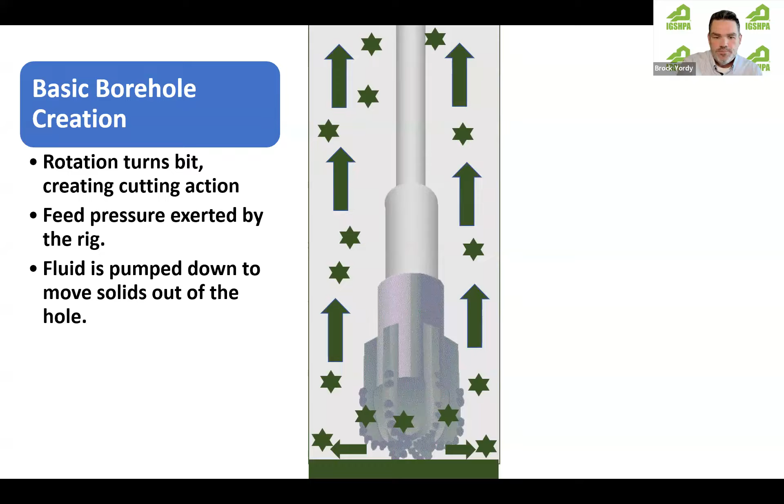If I'm thinking about what the goal is for me as a driller, as a collaborator on a job site, as we're completing this bore field, a hole is not a hole unless it's open, which means it's going to create solids and waste that we've got to manage. It needs to be stable so I can get that loop to bottom. It needs to be straight in the desired direction, and obviously we're playing with angles, which changes our physics and hydraulics of drilling. It needs to be gauged so we're putting the right amount of grouting material around there, and that we're not influencing outside of our bore field. Clean, meaning I'm able to easily get that material, my loop, my grout, everything in, so I have simple product installation, and then efficient product extraction.

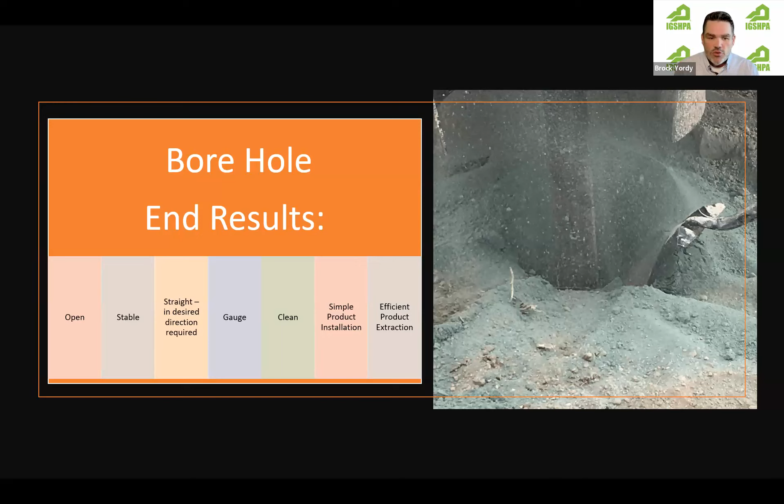Those are our goals, and each one of those can be directly influenced by our drilling methods.

So if I start thinking about what the determining factors are to my method, obviously the big one is geology. If I'm in the Canadian Shield, what type of cutting action and weight do I need to be able to cut that granite? It gets different if I'm in a coastal area.

I was just on Kiawah Island yesterday on a 12-hole residential geothermal project where the formations were very fragile, going from sands and gravels into seashells and coastal stuff into a marl. If I had exerted the same pressure I'd use to drill granite, it wasn't going to work. That's where we get into mud rotary, casing advance, air, foam, sonic. It's got to be the right tool for the right application, minimizing the impact, so we can continue to make the bore field what we need it to be.

So formation hydraulics, the way I can break the fracture of the ground, is very important to the stabilization of our hole, how we're going to get loops in, and how we're going to influence the transmissivity of that loop field as we continue. Next, depth to water.

That's very much about minimizing the impact. We talk a lot lately about air being the way I want to go - I don't have to have a drilling fluid, I can manage these cuttings into something. But when I start producing water out of the ground, let's face it, every New York Times and Washington Post article right now is all about groundwater, because it's a protected resource that we need, and it's not infinite. We need to understand, when we start producing water out of the ground, what damages are we having.

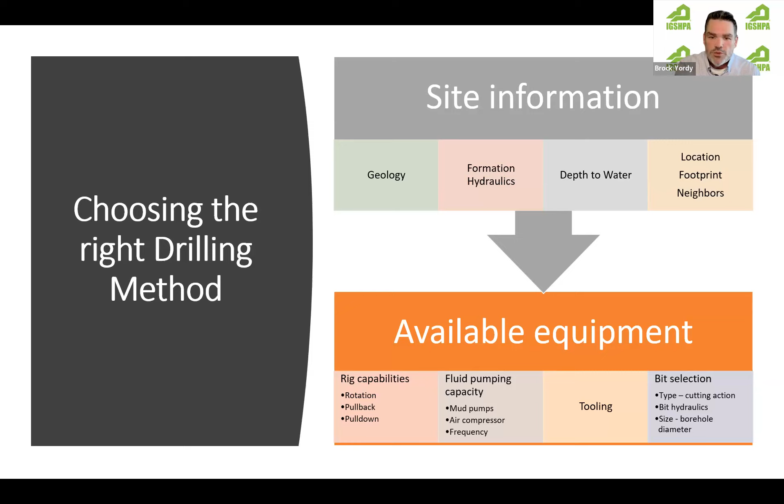So this is not a geology course, and since college and all that I did with geology, I think craft beer has very much impacted how I identify rocks these days. And I know there's a couple geologists that I've seen pop in here.

I'm going to break it back down to what we really need to know, and that's how can I drill it, how can I not, can I break it, can I not break it, can I minimize that impact?

And it starts with our non-reactive formations - that's our sands, our gravels, our rock. They have porosity, they have pore space. We have to minimize the pressure that we exert if it's air or mud, and how it goes out into the formation and creates a larger borehole erosion. I need to look at my permeability - how easily can I move fluid through it?

And then cutting action - again, this is why we see so many different types of bits, and we're going to jump into bits next on site, but it's how can I cut it? What does my particle size look like? How can I dispose of that? How can I remove it at surface?

What is the weight? I get out west, I can get into iron pyrite and get into many other aspects that are really going to impact what I need for pressure to be able to move those cuttings up out of the hole. Depth is 100% impacting that.

When we went from 300 to 400 to 600 to 800 foot boreholes, it takes more fluid at gallons per minute and PSI to be able to evacuate that hole. And what size solid do I want to make?

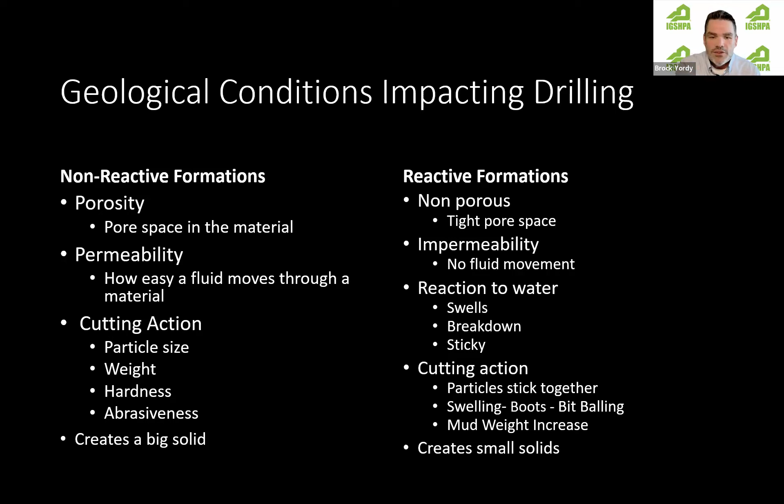The drilling process will always be disruptive. Many times as drillers, we say, it's just going to be a muddy job site. But we can manage these things - how do we minimize the impact that we're going to have on that?

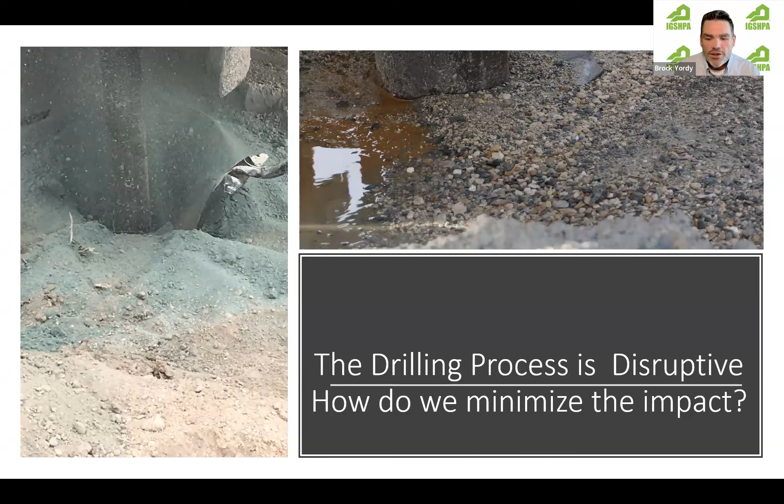So if I'm thinking my idiot's guide to drilling non-reactive soils, what am I thinking about as I look at this log? I look at a USGS log, I look at a test well log, sands and gravels. First and foremost, what is my stability? What is the influence that I'm going to impact? How can I erode? How can I end up using more grouts? How can I end up with a bigger borehole than I need? How can I slough that in and have poor installation issues?

Those are why I'm thinking mud rotary, when we get east of the Mississippi and then into the upper Midwest, is very predominant. It's because it's been very low influence and it's pretty cheap to operate, other than now we're getting into a disposal issue. If I get into rock, solid size - am I using a hammer? Am I using a PDC?

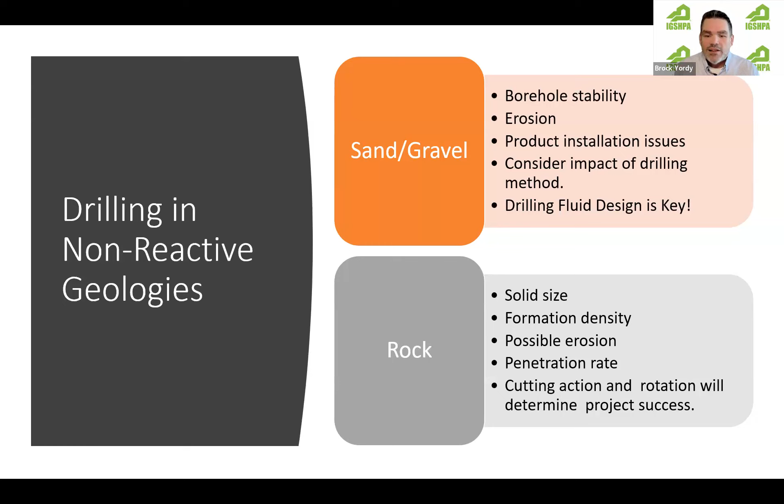How am I creating that cutting size to make it a half inch to an inch so it comes up out of the hole? What does that formation density look like? That's going to tell me my timeline—how many minutes per rod, how many hours per hole it will take when I get into these rock formations. Cutting action is exactly what's going to determine our project success on rock.

It very much was clays and shales, and they react differently. Some are going to be weathered, so they'll break down—not that hard to get out of the hole. Other times it wants to be sticky and reactive, and it hasn't seen water in a very long time, so the amount of fluid we give it allows it to become alive.

That's where we get into sticking drill pipe, plugged bits, cutting sizes, and surface areas that start to bind together—a boot formation, where cutting sizes bond around the stabilizer or the tooling, and we're not able to get that fluid up out of the hole. It starts exerting pressure on the outside of the borehole, and we end up losing fluids, getting inadvertent returns, and an increase in fluid density because they want to go back to their colloidal size, becoming part of the drilling fluid and increasing that solids content.

So what can I do? I can prevent these reactivities, these breakdowns, these sizes, with the right fluid design—whether that's air and a clay inhibitor, or a mud with a chemical inhibitor, using surfactants and soaps, and partially hydrolyzed polyacrylamides called PHPAs that wrap around them. That's things we have to consider as we're looking at how we're going to drill this and what influence we're going to have.

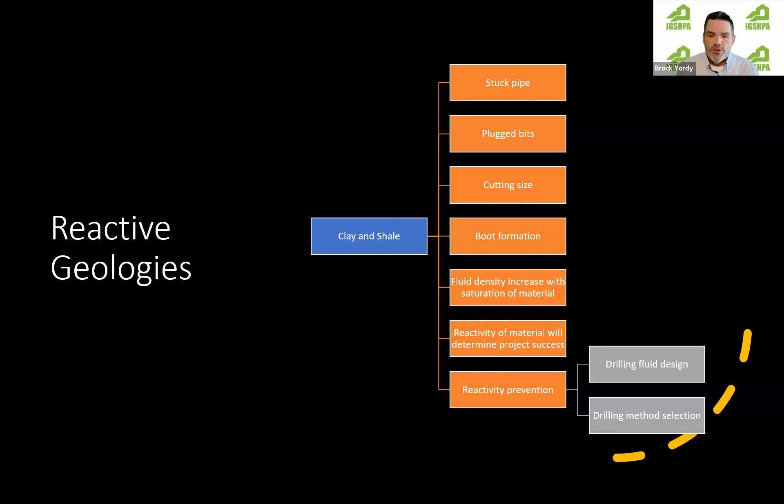I'm a fat kid, and I like to eat. When we look at what we want to cut—a clay style, a soft formation—I'm using the front of my teeth, thinking like an apple: I bite it and then chew those pieces into smaller bits. Now if I get into rock or denser formations, I need something more like my molars—I take a bite and then grind that up into a point that's easy to swallow. That's when we get into bit selection.

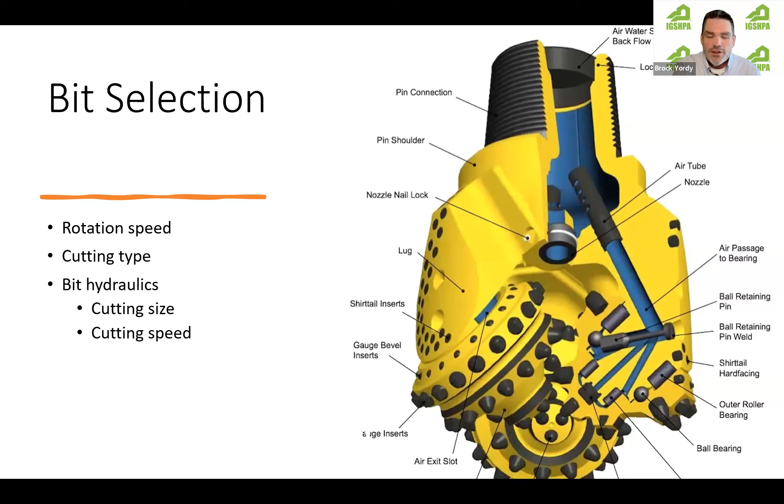We have endless technology from the oil field and other industries now that we can apply. It's funny, I say 'now,' but they're all 40, 50 years old. Garen Ewbank was talking about PDC bits in the mid 90s, and at Ball State we were like, wow, these PDC bits are the greatest thing ever—and they're like, yeah, these were all built in 1991.

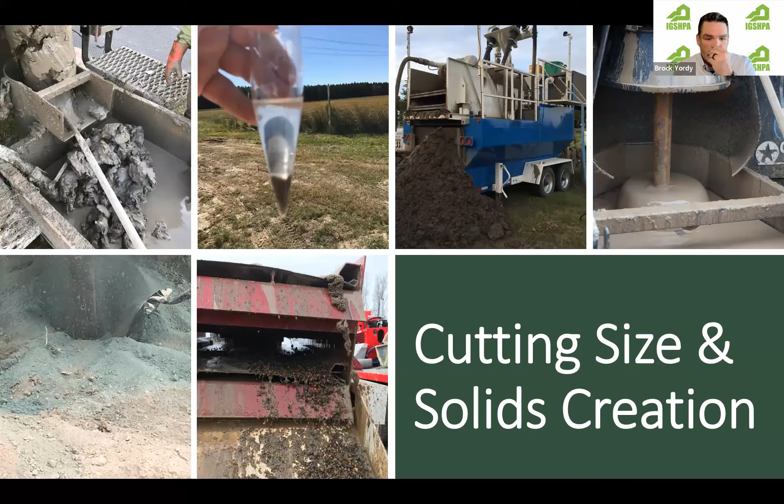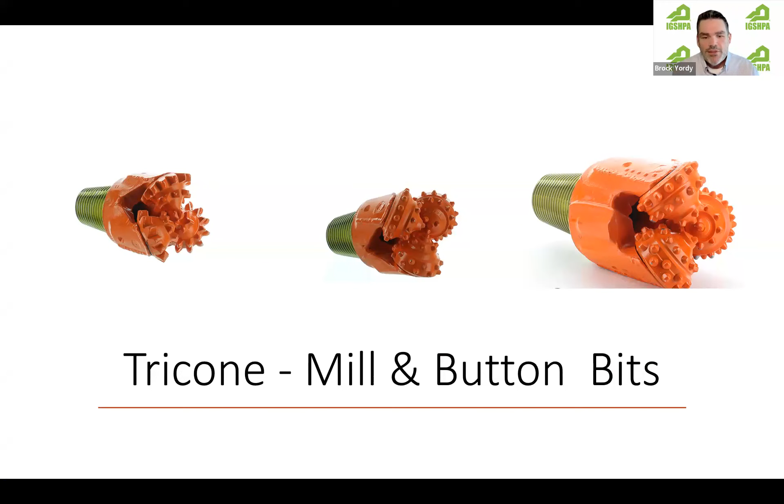So the oldest technology we have here is our tricone bits. This is really what allowed Howard Hughes to be crazy—the patent on this tricone bit and the ability to have that cutting action with the skirting, going from a mill tooth, which I'd use for those soft reactive formations, to a button, which is like my molars to drill rock.

The big piece we've lost along the way is our jetting action, and part of that is from fluid flow. For the geothermal industry, that 5 to 6 inch hole, we only really need about 150 gallons a minute to maintain the right uphole velocity. And we'll get into that.

A big piece of bit life and maintaining good production rates is having the ability to force the cuttings away from the bit face and up around the rod so we can get them to surface and remove them. That requires PSI and jets. Jetted bits are still a very important aspect.

We've just somewhere along the way lost that in tribal knowledge and wanting flow. There are plenty of places where I get into reactive formations where if I can have the jetting action—this doesn't mean we need to go out and buy a big, bad oil field piston pump. It's just allowing enough of the right force exerted at the bit face to keep it clean.

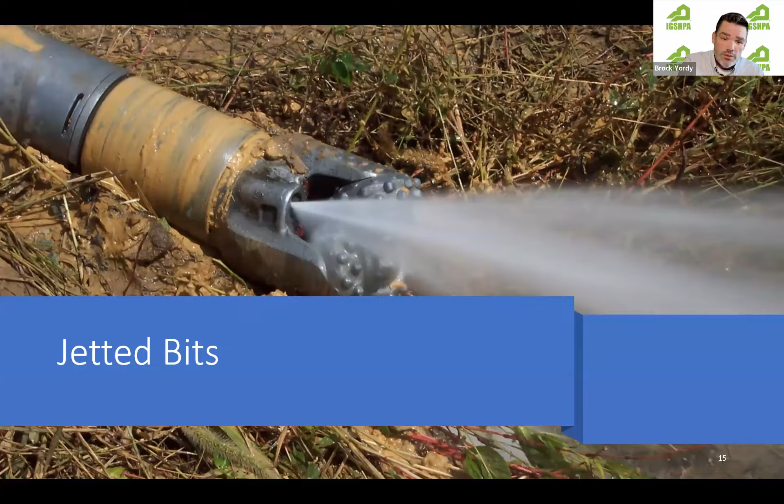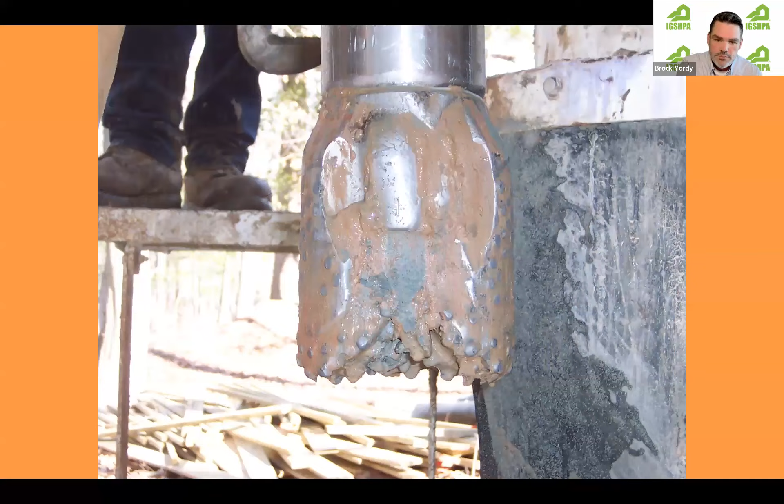We see this on jobs, plenty of places, with young drillers over-drilling into a dense clay formation, and then we end up pulling pipe and pulling these sleeves of clay.

Again, this is no different than if I'm going to make a smoothie. What do I need to do after I put my ice and my milk and my bananas and everything in there? I can't start it on high rotation and think I'm going to get a good cutting action. I have to ease into it, and I also have to ease into how I'm going to penetrate.

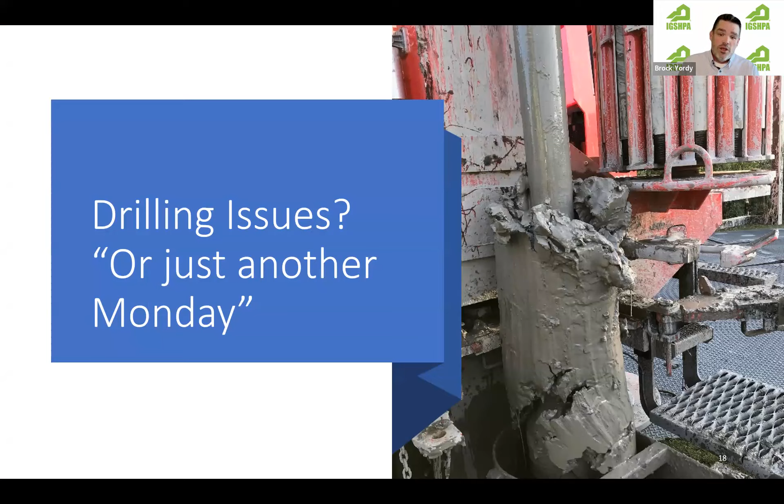So ideally, we want a bit that is able to move the cuttings away from the bit face. When we don't, all too often those abrasive solids create heat, start us on that path of deviation, and we're no longer able to maintain the production we want.

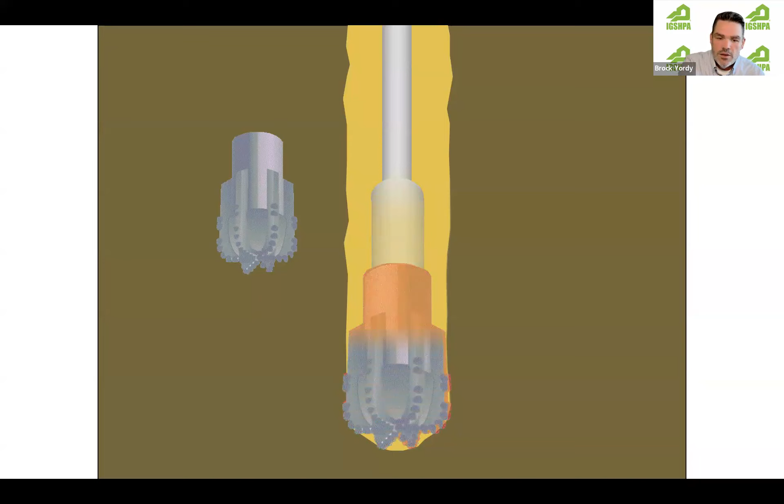So we're using that fluid to move the cuttings away from the bit face so we can keep it clean and keep the cutter heads going. The other half of this is, as we continue to drill more complex boreholes, if we have a drilling fluid full of solids on surface that we're sending back down, we're doing the same thing and causing as much damage. We'll get into that.

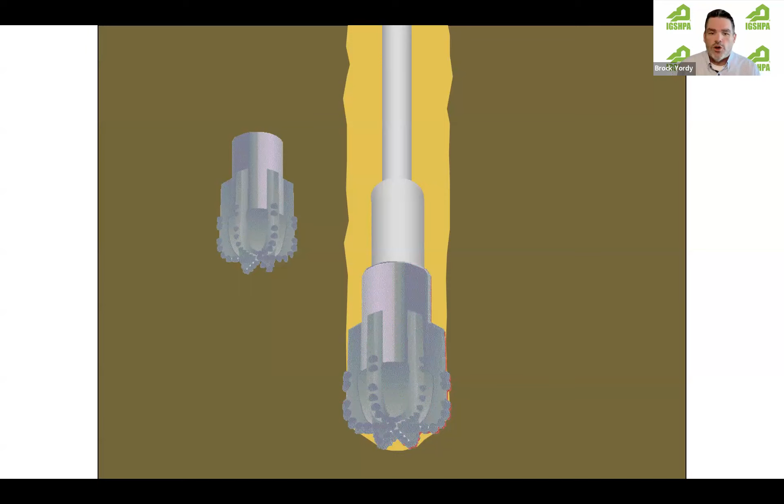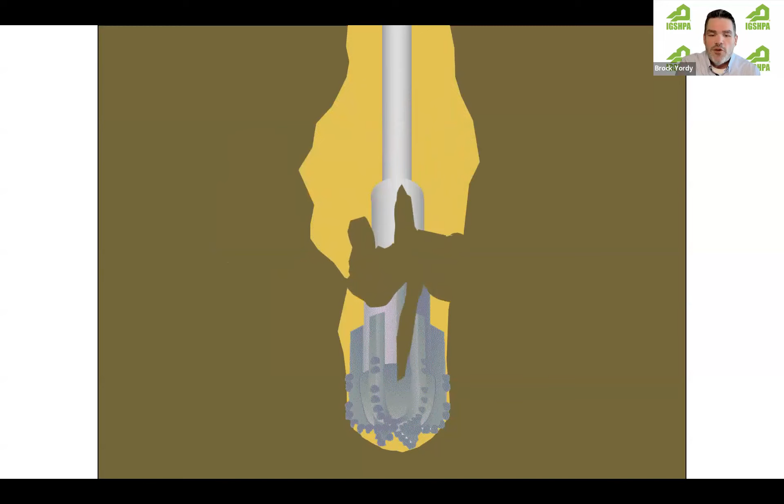My nice, neat animation is not working, so we'll just move on. This is definitely what we do not want to have happen.

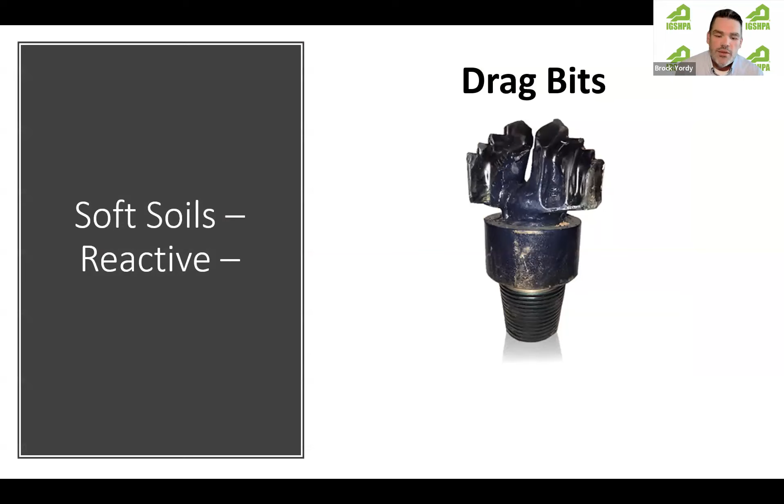Drag bits are a desired piece of tool that we need on surface in some places, but depending on the design—from a single wing to a chevron—it's all about cutting action and slow penetration. That's what I'll say about drag bits. But this is not slow penetration. We're trying to make a cutting that is the size of a quarter, an inch in diameter.

Polycrystalline diamond compact, or PDC, can stand for pretty darn costly. There are plenty of these bits out there, and now we've hybridized them with drag bits so we have the winged capability for cutting soft formations, but also when we get into competent limestone or shale, we can make good hole with the diamond cutters.

These bits work fantastic if we have the proper weight on bit, which means we're using stabilizers. We can't use pull-down on these.

By the way, running a bit like this means those diamond cutters make very small cutting sizes, which when we go to disposal takes more surface area for the fluid to move them up hole. It's a much finer material to separate out, which means more pumping off and disposing we do by the end of a job.

And this is a balance. There are many places where these are successful, and other places where a button bit can do just as well. There are endless possibilities with PDC bits these days and where they come from around the world.

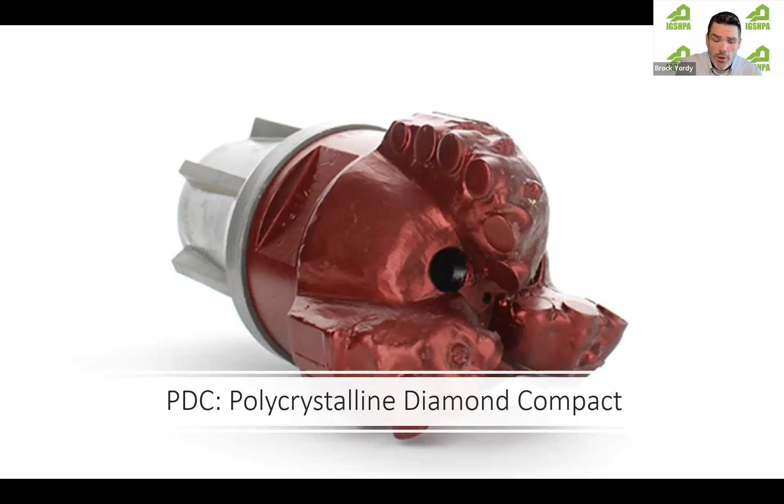Hammer bits—we could talk for an hour or two on hammer drilling, foams, and cutting sizes. The big thing here is depth to water. That's going to impact the action of this bit.

A lot of times a six-inch hammer is a small hammer. If you look at a 3.5-inch or 4-inch drill rod, it's very hard to have the annulus—that space between the drill rod and the wall—make those cuttings come up out of the hole effectively. So it's very much a balance of how we design a system if we're going to use hammers.

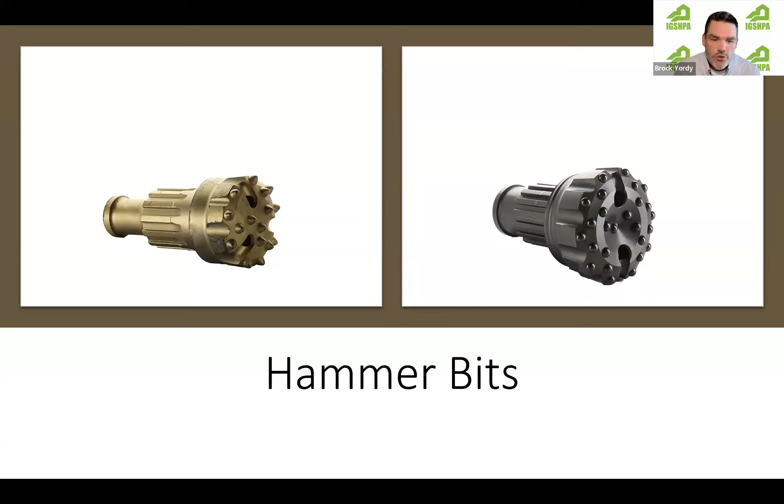For all the drillers out there, I know they're saying, Brock, we defy physics all the time because we don't believe in it, and we can make these work. And yes, I see them work, but at what sacrifice, and what destruction are we doing to that bottom hole tooling, not to mention the formations.

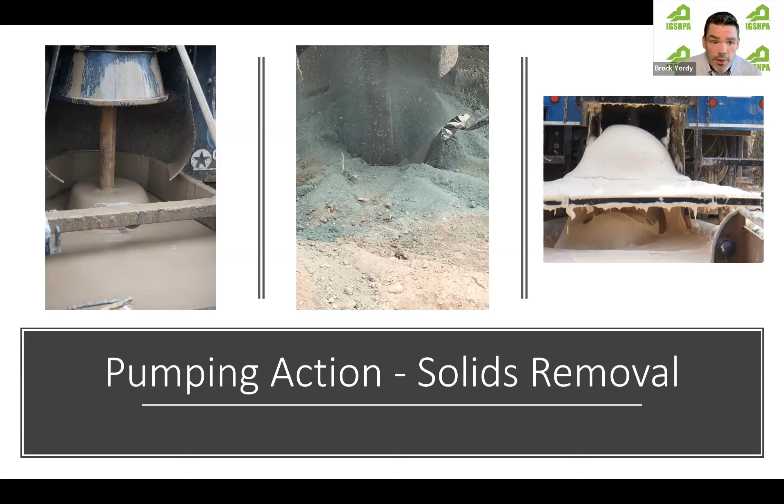Pumping action, this is where it comes down to when I'm looking at what an effective drilling operation is. Can I get 1,600 feet of drilling a day done, or if I'm going to get 800 feet of drilling a day, and how am I reducing my costs?

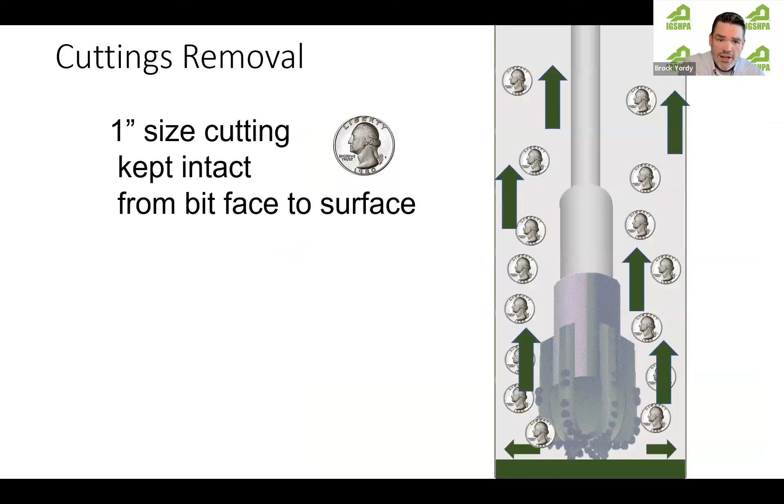So we saw this slide, we got the cuttings moving out of the hole. We're trying to maintain that 1-inch size cutting, size of a quarter. So when you're talking to your drilling contractor, or you are the drilling contractor, and we're having that discussion - mud rotary, water-based drilling fluids - we are using a mud pump to force cuttings out of the hole at 60 to 150 feet per minute. That is optimal uphole velocity. That is not going to deteriorate those solids. So when they come to surface, they can be easily shoveled out, or they can be taken out by a shaker screen. Multiple ways.

Everybody, we look at air and we go, heck yeah. Why the heck wouldn't I want to be at 3,500 feet per minute uphole velocity to 7,500 feet? And I think of Stan Lee and Spider-Man, and I go, with great power comes great responsibility. Because here's the deal - competent formations will take that force. But we get into fragile formations. We get into any place where we got all these beautiful inland lakes, and we knew 14,000 years ago there were glaciers sitting here. It's going to be a big deal to make sure that we understand the competency of that borehole and what it takes to move those cuttings out of the hole without forcing them out.

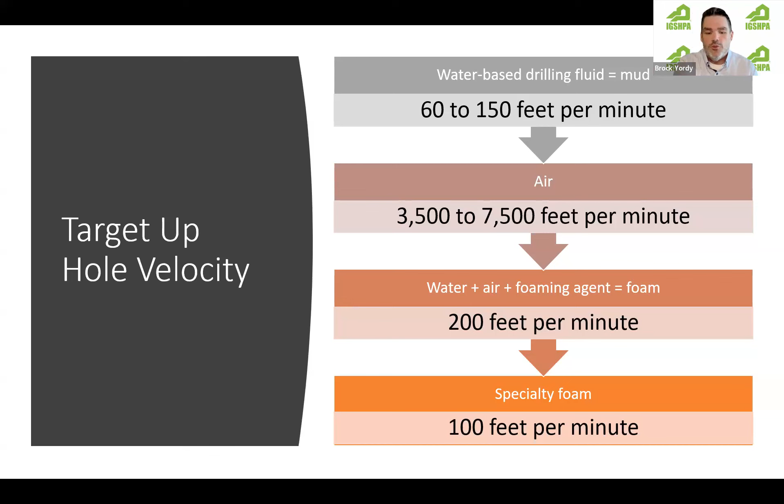So what happens when I don't have that optimal uphole velocity? The cuttings break down at the bit face, and then as they go up. And I like using the money analogy because it's costing us time, it's costing us fuel, it's costing us horsepower, it's deteriorating tools, it's deteriorating equipment on surface.

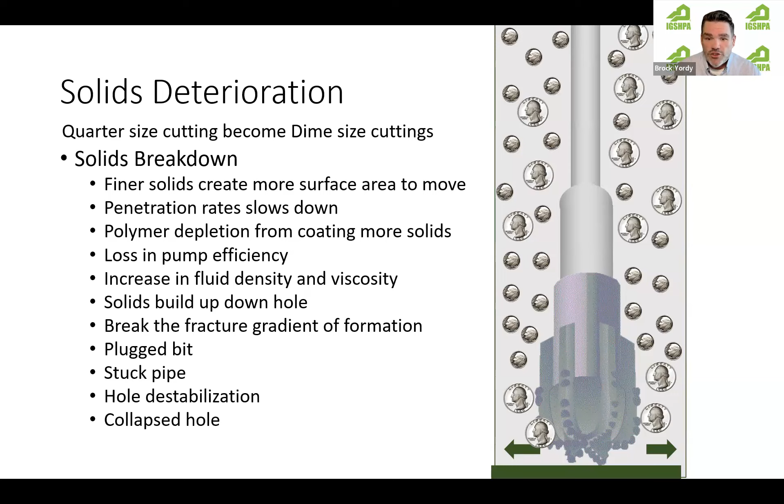We start building up downhole, and we either force the hole to destabilize out, we plug the bit, or we stick pipe. We've all been on projects where we've seen they've had to go back in the hole 3 times to ream it out, or we've had to drill our way out. Those are all situations of high solids and not the right optimum uphole velocity.

I like to think of this no different than the space program. If I'm going to have optimal uphole velocity, predominantly mud rotary will dominate what we need to do in our industry, because we have lots of mud rotary drillers and they're nimble, with less specialty equipment requiring less operational costs. It may not be the most 21st century technology, but it is reliable and low impact.

So if I'm looking at mud pumps, my bore field, and my depth, and I have a mud pump that's only allowing me 60 feet per minute uphole velocity, I need a fluid that's moving faster than that on those denser solids to maintain that solid not deteriorating, so that it's moving at 60 feet per minute.

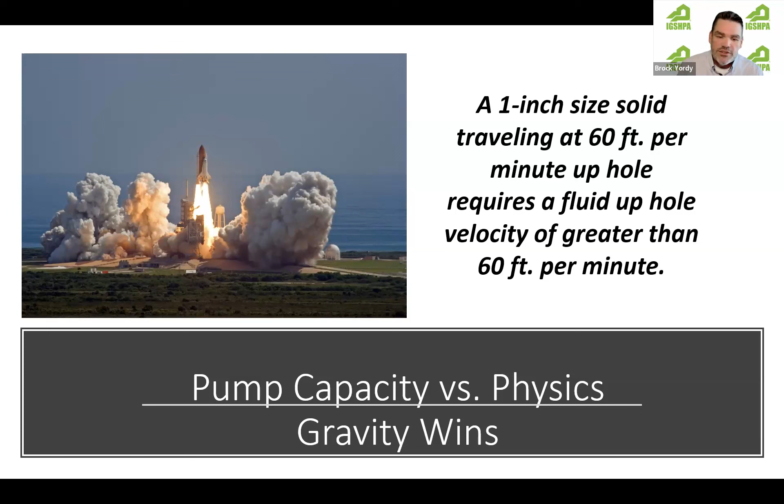Size and scope, we can see on a test hole a 400-gallon mud pit with a desanding cone, going to a solids control unit or multiple solids control units, and how we manage that site.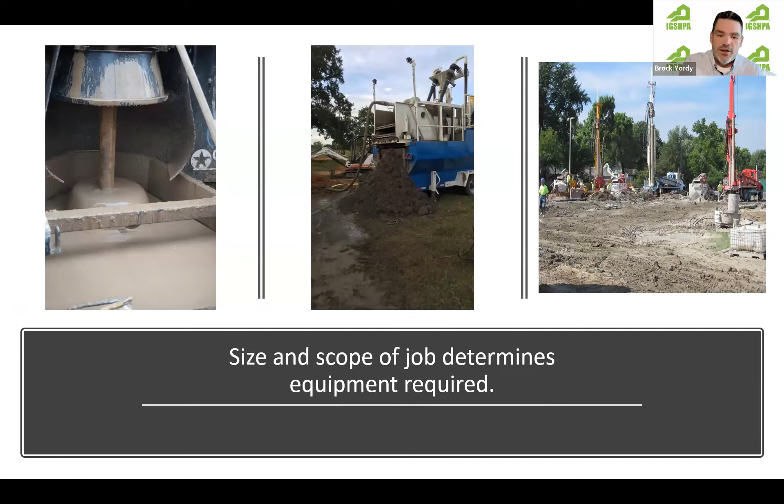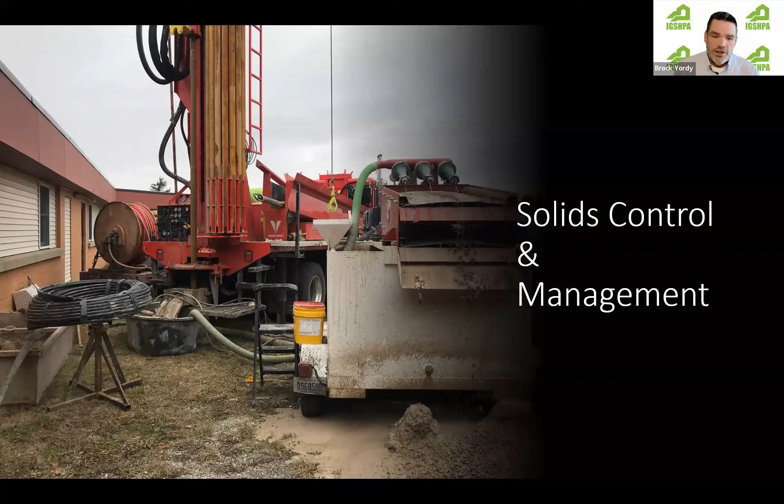So when I get into solids control and solids management, what do I need? I need to be able to remove that stuff from the hole so our hole's open. But now, how do I handle that fluid so I can continue to drill? Even if we get into water hammers, how am I reusing the water in my water hammer? Am I running it through centrifuges, or going back to straight water? Everything comes back to the solids we send back down hole incorporating with new solids and creating problems. So if I look at solids creation, I'll jump through this quickly.

Yesterday, I was on a job that was 10-foot rods with a 5-inch bit. They were moving 2 5-gallon buckets per rod. A 5-gallon bucket is about 0.7 cubic feet. When we talk cubic yards, there's 27 cubic feet in a yard, 7.48 gallons to a cubic foot. And 0.5 cubic yards is a skid steer bucket.

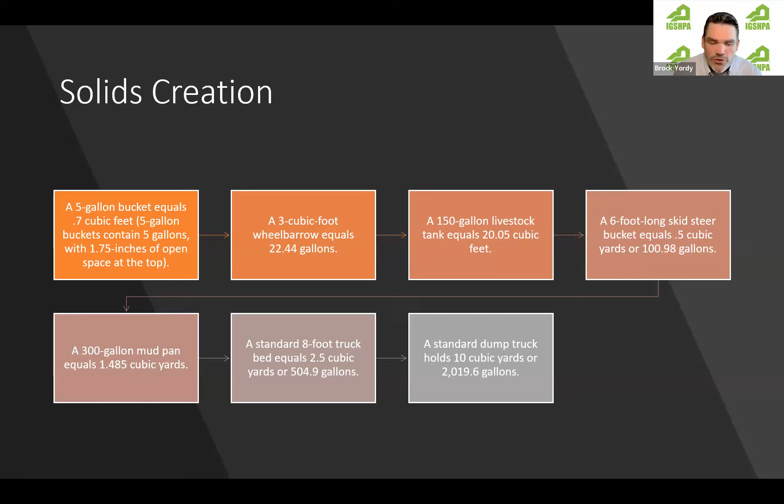So as we go on the George Lucas project with Midwest Geothermal, at the end of the day, there were 2 dump truck loads, 2 10-yard dump truck loads of solids that had to be moved.

This is where, as we look at how we're building our jobs out, there aren't many 10-inch holes we do, or even 8-inch holes. But even looking from a 300-foot hole to a 600-foot hole to an 800-foot hole, at a 4.5-inch hole at 600 feet, I have 2.45 cubic yards of material that's there. That's not counting the fluid I brought out of the hole, and not counting the displacement at the end of the hole. That's just the material so I have an open hole to put the loop in. Is there some deterioration, and do we force some into the formation?

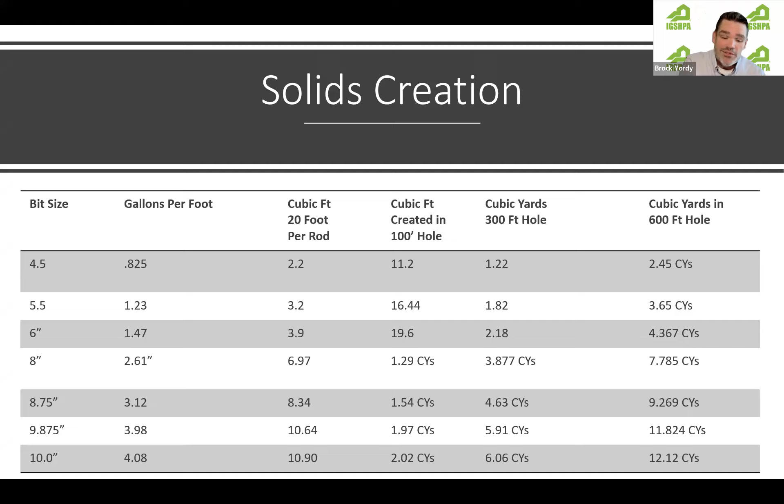Yes, but we cannot plan around hope and luck on something like that. This was yesterday's project on Kiawah Island - 5-inch holes, 250 feet deep, not inch and a quarter, 1.25 cubic yards. This was Kiawah Island - anybody who knows ocean course golf course, top 5 in the country. I know Jack's on here, Jack plays golf. This house is 6,500 feet, and it has 12 boreholes.

That's 15.14 cubic yards of material that has to be disposed of. Luckily, on this job, the way it's being manifolded in, a lot of that material can be put into that trench. If we just think of this as 12 holes for a home, now let's think of a thermal network where we have a very small space where we're going to put 50 holes, 5-inch to 600 feet. What does that material look like? We can't wait till the end to put it into a trench. So how do we take semi-dry solids we can dispose of easily along with the fluid we created, and how do they get disposed of?

Alternatively, on thermal networks, these urban green spaces and whatnot, we've done a really good job of making parks and building super fun sites. And now we got to go back and talk about the heavy metals, the forever chemicals, the Gen X chemicals - those things that are going to require a TCLP test and special disposal that can impact our cost. That's a very big piece for us to all think about.

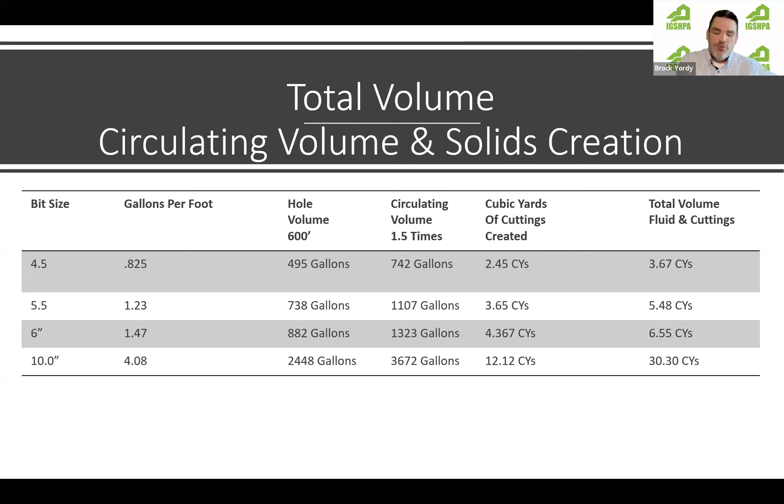And obviously, with everything we're doing, we want to be responsible environmental stewards, and we want to use the least amount of fluids possible in order to maximize our efficiencies, our impact on the environment, and our profitability.

So if I look at that solids control program, and that's getting into our most basic systems like a mud puppy up to much more complex systems that use high G linear shakers, what am I asking myself as a drilling contractor? What is the total fluid volume per hole? I calculate it, then I set that limit if that's 15, 20% over.

What is my method? How do I maintain the drilling fluid properties required? How do I maintain a water quality that's under 10 NTUs so that I can run it back through a hammer? How am I using additional water to dilute out so I can keep drilling?

And this is where we get into that self-taught, tribal aspect of, oh, I'll add 100 gallons of water and that's going to reduce my mud weight. And we're not looking at it as a mass balance equation of I'm adding 800 pounds, 100 gallons of water, 834 pounds to a system that at 1,000 gallons, 9-pound mud is 9,000 pounds. We're not reducing there. So that becomes our fluid disposal.

And I'll tell you what, Badger right now loves the heck out of all of us. And we can see that from the Chicago suburbs of $6,000 a truck with a union driver to the last project that I was seeing in Ohio where they came in and it was $3,200 a truckload.

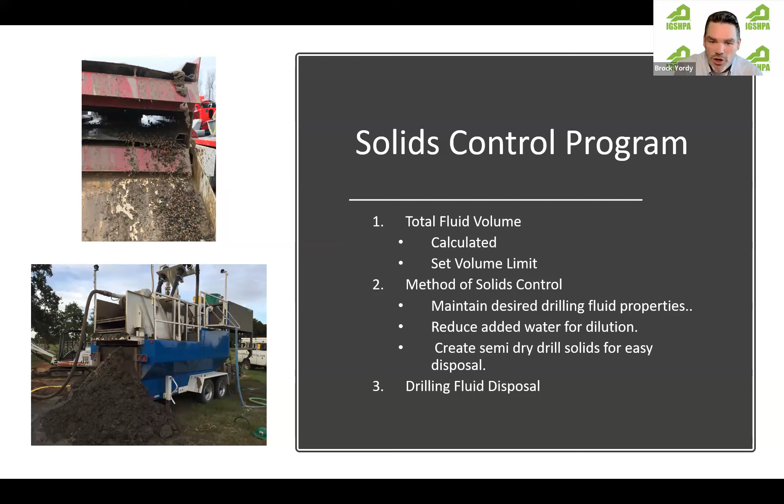So what happens? I start, and we're going to talk mud now. I start with a drilling fluid that is 98% water, and it's been augmented to have a viscosity somewhere between 35 and 45. Water is 26 seconds per quart. It has a mud weight just a little over water.

Content's good. As I continue to drill and I incorporate solids and bring things out of the hole, we have breakdown. And so we start to see the hole is becoming clean because I sent down something that weighed almost 8.5 pounds and I had something come back that weighed 10 pounds. That's good. That means I'm getting the cuttings out. I can make it to bottom. I can set my loops. I can do what I want.

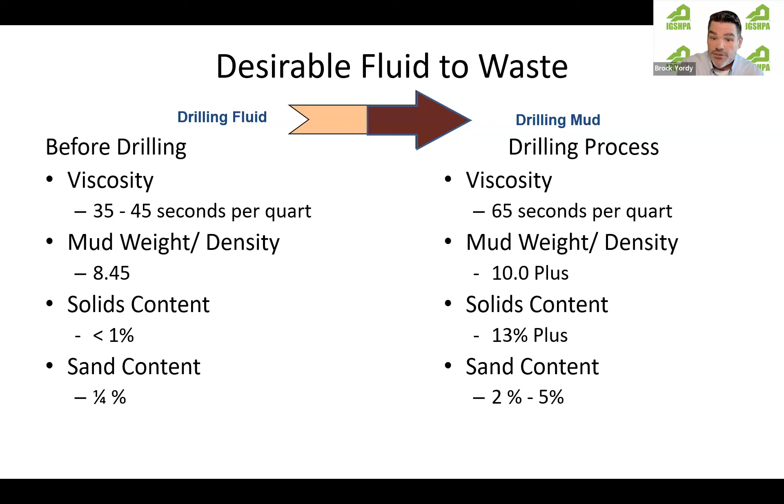But now I need to remove that 12% solids that I just created, or that 13% solids, out. How am I doing that? Is that a shovel? Is that cones? Is that shakers? So if I'm looking at being a good neighbor, I'm on a project that's residential.

How many days do I have versus a thermal network versus a large scale geothermal project? How am I handling this? Is it from a mud pan to a couple cones to going into a large unit that can clean? My production is fully dependent on how fast my system can remove those solids to continue.

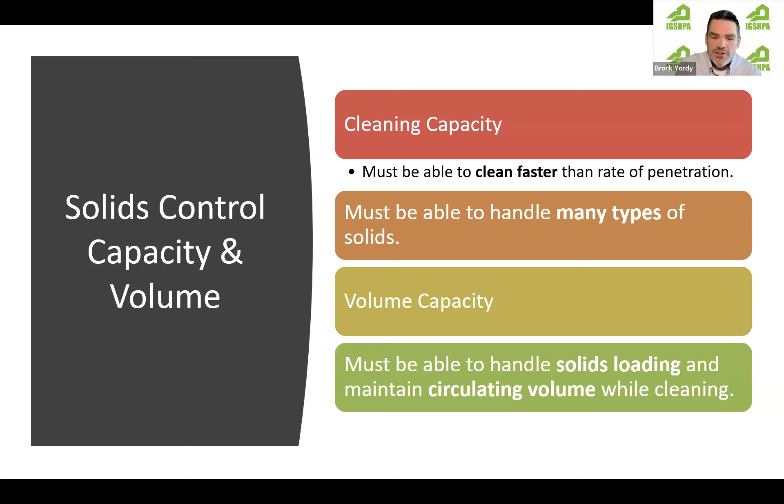So we get into that solids management, and this is before we dispose of it. This is how we get to how much we're going to have to dispose. I have passive - that's that mud pan, that earthen pit that we used to see a lot of. We're waiting on time and physics to settle those cuttings out.

And physical - I got a shovel, and my assistant is shoveling away. And that physical labor aspect, that ergonomics, the impact risk mitigation of how many days in a row can we do that, or how many holes in one day. And then we get into that mechanical system and how can it be able to clean multiple holes at one time, 2 rigs running off one. How do we balance that system?

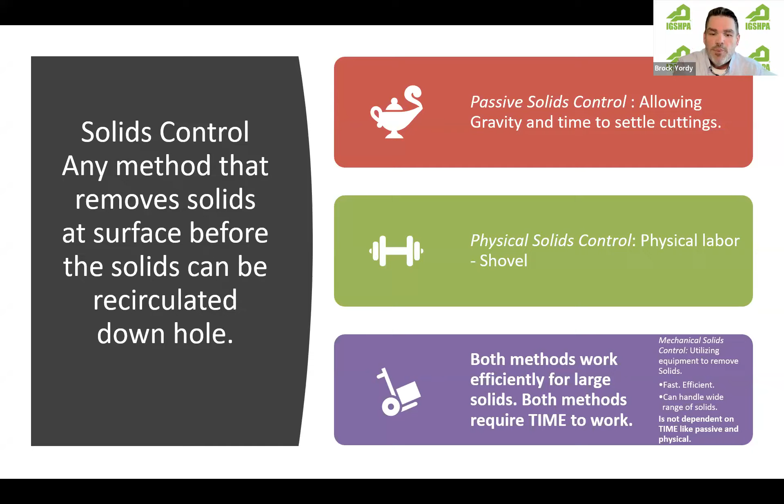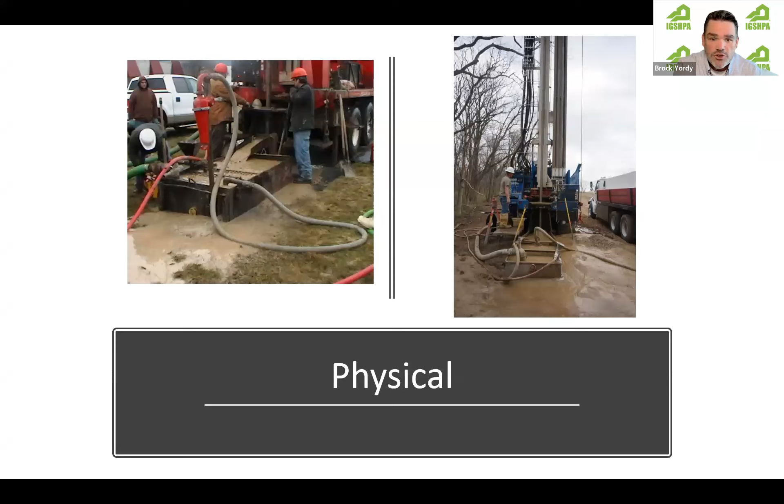So here's physical - you can see the guy shoveling, you can see the big earthen pit. Here's some mud pans. They both have hydrocyclones on them that are removing some of the finer solids, but it's still dependent on shoveling.

The big thing with earthen pits and these portable mud systems - they're very good, and we see how they can be utilized. I've utilized them all through the Chicago suburbs with great success of not making a big muddy site. But it is definitely rate of penetration plus solids is going to equal time. How much time does it take for me to remove those? How much physical horsepower is it going to take?

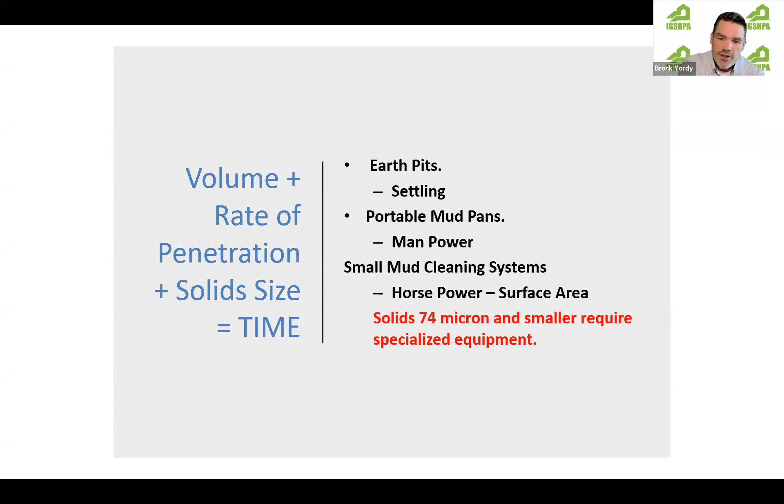Why is that important? So we get to this point of setting loops. And ideally in the water industry and many of the industries where I need to remove a resource from the ground at the end, I need to have a drilling fluid that's less than 9 pounds per gallon.

Why? Because at 9 pounds per gallon, I am 5% solids. I want you to think about the grouts we spec on jobs, back to the days when we were still doing 250 or 400 pounds of sand and bentonite.

And what's the solids content? 400 pounds of sand is 72% solids. So if I have this loop with water in it and I'm trying to set it, and we have this stinger or weights to offset that buoyancy, and now I'm trying to trip into the hole with 13% solids, a 10-pound mud weight, you can absolutely see why we're fighting it into the hole.

Not to mention, how am I going to get it in? What could slough off? So it's very dependent, as I'm drilling, on maintaining something truly low. I'd love to see under 9 pounds. What can we live with? Somewhere between 9 and 9.5. At 9.5, 10% solids, we're going to fight every loop into the ground.

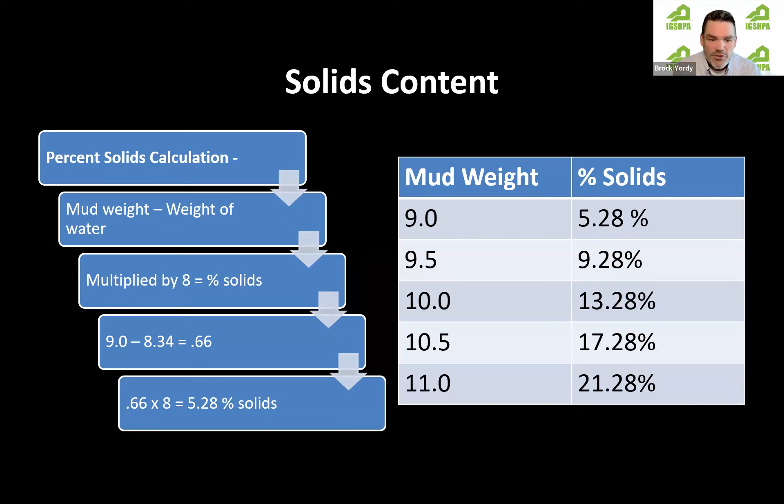As we design different loop systems, or try to put 2 loops in one hole, or all the different ways we can look at that, the closer I can get back to a specific gravity of 1, that 8.34, that's where I want to be.

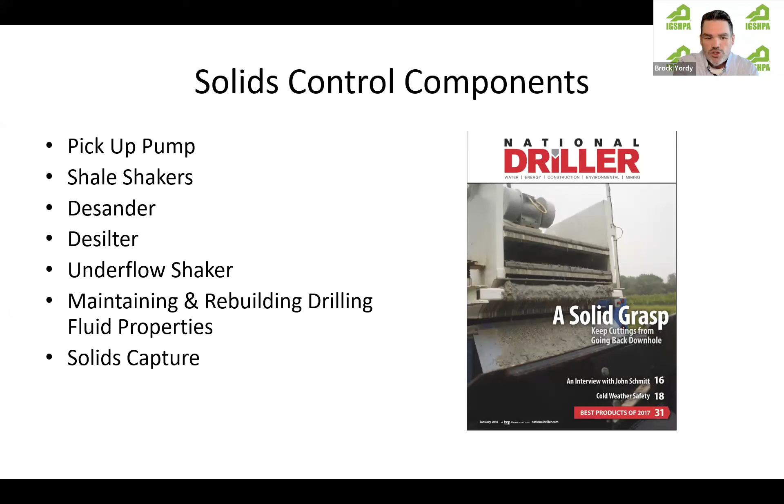So the components of a good solids control unit: I need a pickup pump, I need shakers, I need desanders, I need desilters, an underflow shaker, and I need to be thinking about my disposal.

Here's a big breakout, but the easiest way to think about it, starting top left, those are our shale shakers, taking out all material that is 225 microns, 80 mesh. That is big stuff. Sand particle size is 74 microns. So on that first sweep coming out of the hole, I want every big solid that I possibly can to get out.

Next, it falls through those screens and gets picked up by our cones. Our cones are separating everything from 74 microns down to about 50, a D50 cut, 40 to 50 microns. That's taking those solids out so I can maintain a fluid that's not going to damage my top head, my tooling, or cause downhole issues.

Depending on where we are in the country, I may even have to have a finer cut with some desilters, or get into centrifuges. There's plenty of other ways we apply this, but those solid sizes depend on what it's going to cost to dispose of at the end.

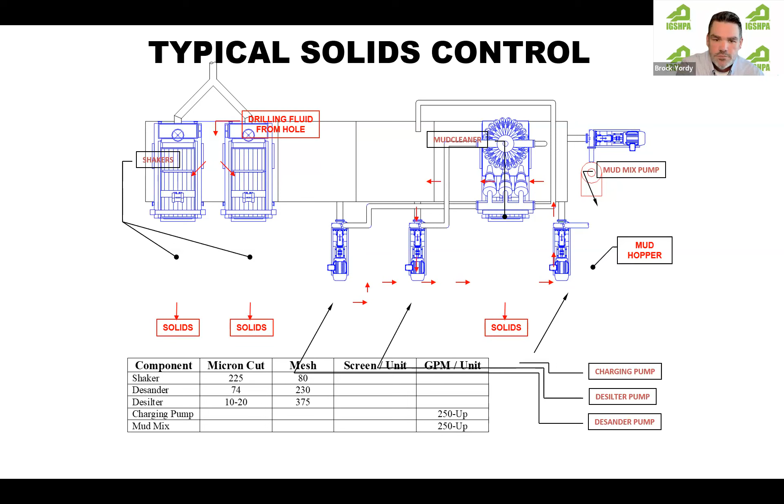Boy, did I put a lot of arrows into that building it. My goal is to have a pile of cuttings that is semi-solid. Yes, you'll have some fluid in it, but as I move along, that's something I can load into a dump truck or a roll-off box and have it easily disposed of.

That depends on if I need a toxicity characteristic leaching test because of where we're drilling—this green space, this parking lot, this brownfield. In some states, nobody asks a question and it ends up getting taken somewhere and it's gone, ignorance is bliss. And then there are other places where we're going to ask, wait, where did this go? And how did I just become a co-generator that contributed?

That's a big piece to this: our universities, our greenfield sites, these places where we want to do a thermal network. Whoever owns that property is the EPA number I want to be co-generating with, not saying it's all on me as a contractor.

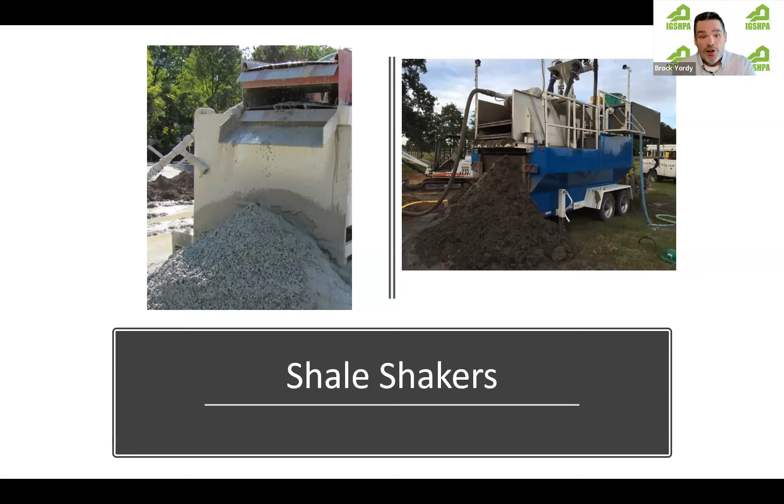I spent 4 years with Suez and Veolia, and they're really good at disposing of stuff at a certain cost. Every time, it was framed as a co-generator, not that I'm the generator, because I'm the one making these cuttings.

So that shaker system—I know I'm blowing through this, folks. It's an hour talk, and we wanted to focus on mud and solids control.

We have 2 styles. We have our hydraulic mud puppy style, mud slayer, edge systems. They're a low G hydraulic. It's like running on an elliptical. It's flipping those solids down, and you have a big coarse screen.

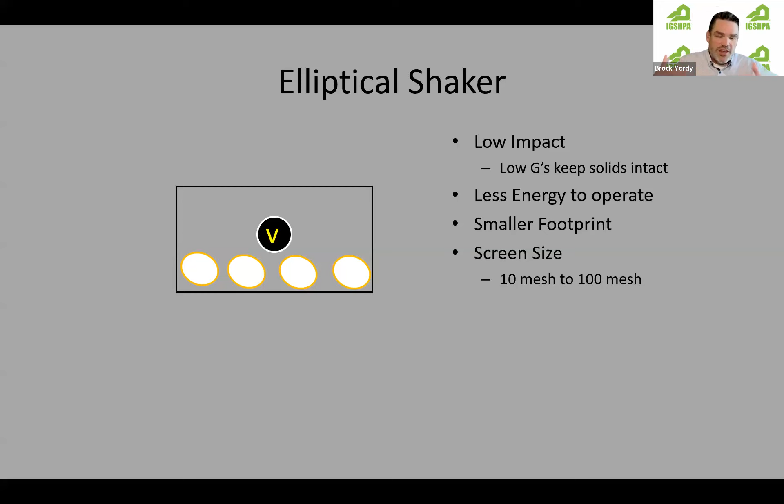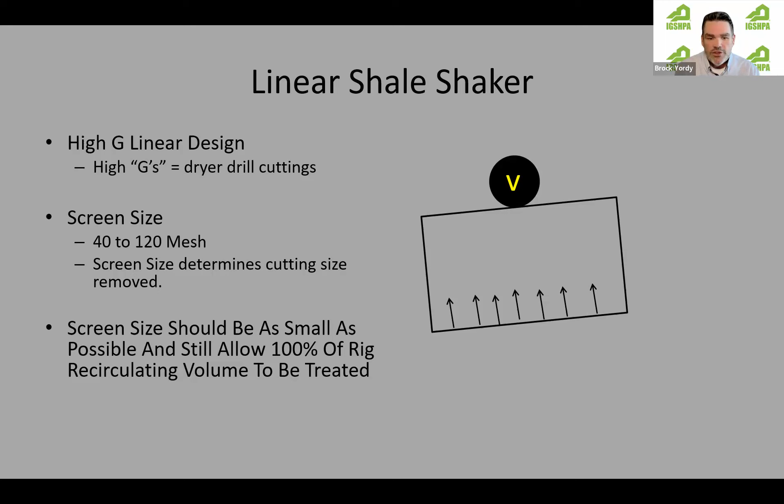The alternative is high G. This requires a solids control system that runs off a generator, exerting those high G linear forces through frequencies of an electric motor. That allows me to have finer screens and remove more fluid to reuse. For hydrocyclones, we use 5 and 6 inch, predominantly 5 inch, which is actually a desilter.

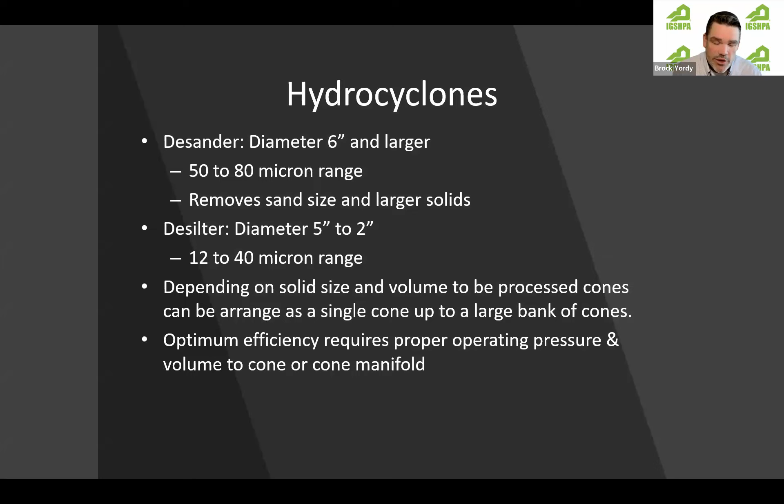The idea is to get more of those sand-sized particles out that are hard to settle. How do we do that? They come in the inlet, they make a cycloning effect. It moves the clean fluid to the outside and basically drops the dirty fluid out. So when I have a hydrocyclone running at 75 gallons a minute and it's optimal, it's going to give me 80% clean fluid back to the rig. It's going to give me 20% fluid that is undesirable bad stuff that now we try to run over a screen to catch some of it out. But we should understand with cones running at 75 gallons a minute, 12 to 13 gallons is going to generate waste that we need to be ready to dispose of.

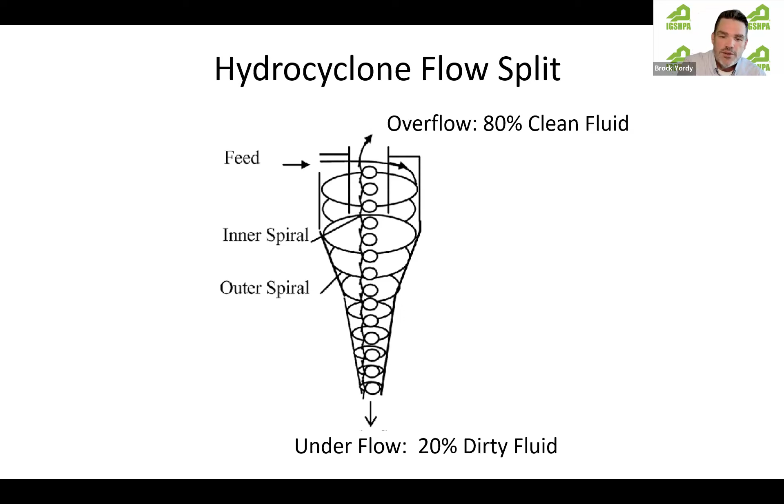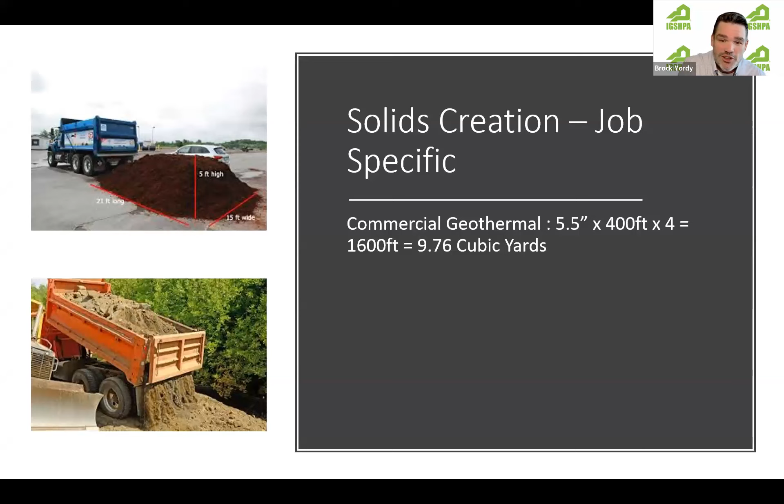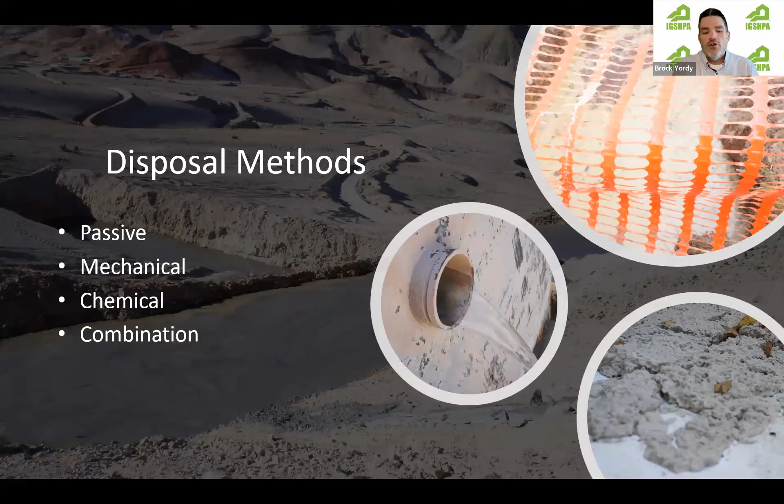Again, here is a 5.5 inch, 400-foot hole. There was 4 of them, 1600 feet. That's a dump truck. That's what I need to be thinking about. How many pickup truck loads, dump truck loads a day am I producing on site? And that gets right into, what am I disposing of? Am I disposing of a big fluid? Am I disposing of a fluid pile, a small fluid pond, a box that I need to hit with something, and then some semi-dry solids? How can we get there? What can I reuse? And I look at my disposal options.

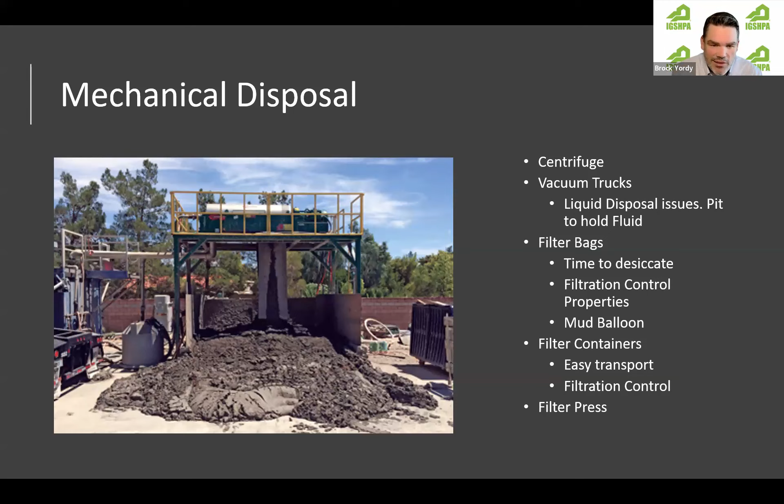What do we have that isn't even brand new? Because I field tested it in the middle of the Atacama Desert 12 years ago.

We have many chemical disposal options now. And there's flocculants and coagulants and different ways that we can break out bentonite and solids and get back a clear effluent. This is not water. I do not want to drink this. However, I can mix it back into a drilling fluid, be it a foam or a bentonite, and reuse it, and it will bind up any of the extra cations or things that would have made it. And this makes it so that I could reduce the amount of fluid that I'm using on a site.

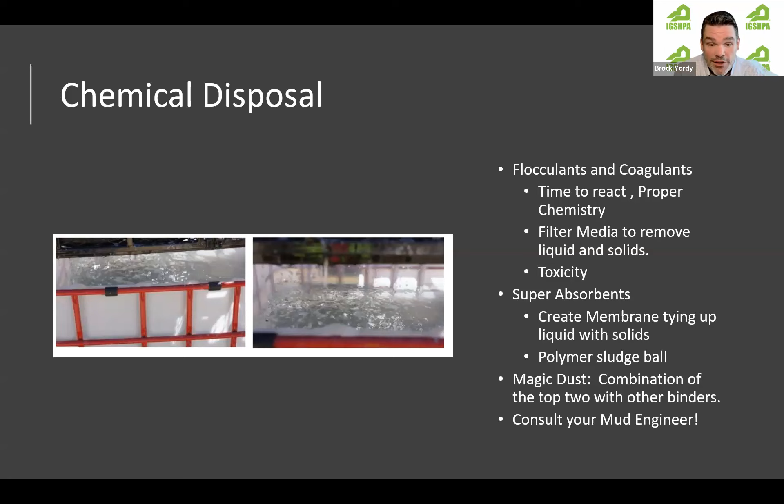And we talk about being environmental stewards and having this green, great idea. Again, if I can say I can use 50% less water on this site, what does that mean for us? Right now, maybe not as much as it will in 5 years. In California, in the Western United States, Colorado Compact, right now, hell yes, this makes a big difference in doing geothermal in the Navajo Nation or not.

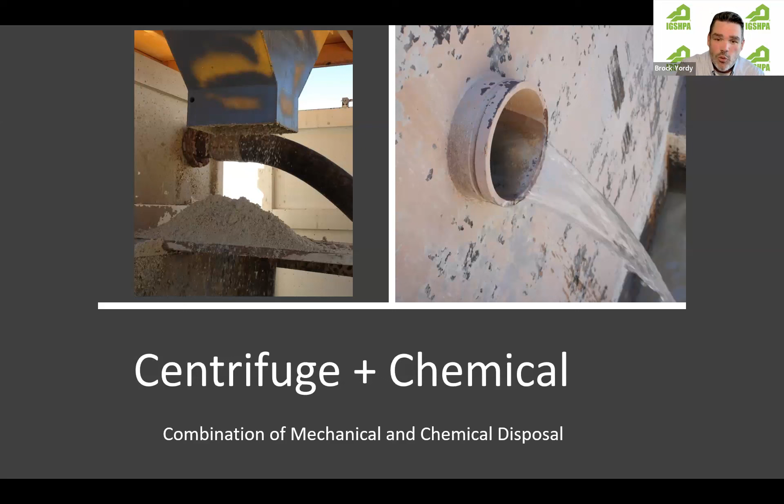Centrifuges and chemical, it's a great way. Ritchie Brothers, I see centrifuges pop up all the time from these big caisson companies that are gone. There are wonderful combinations that we can do with alum, different coagulants, flocculants. All the major fluid companies have an oil field group that now has NSF approved chemicals that will allow us to do this, full of batwing and eye of newt or whatever they put in them these days. But there are ways that we can get back to having a lower disposal cost than just having that 10 cubic yard vac truck show up and it takes 7 away, which is about 1,500 gallons. And where are we next?

So ultimately on that disposal plan, we have to follow the state and local regulations. We're pushing to be the best renewable energy, and that means obviously our drilling phase has to do that. That could cost us, but we need to know that information. How are we going to contain our centrate? I see lots of ponds. And then I ask myself, it's spring, it's going to rain. How much free water are we putting in there? There's a lot of different disposal discussions that we need to have.

The hard part with a good drilling fluids and solids control program is that the solids content determines what our cost is going to be of how we turn it into a solid. That's why we want to use it until it's spent. A good drilling program lets us have that discussion: what do we need for our drilling fluid properties to maintain production and not damage equipment, and how do we dispose of that clear water breakout?

And it can't just be, hey, it's clear, I'm going to run it in a stormwater drain. Working for Veolia, I've seen all kinds of stuff come through and think, wait a minute, where's the construction site, and who do I need to talk to about this sodium blue bentonite that's now coming through our system? All disposal methods are going to require time, and that's the expectation we have to have.